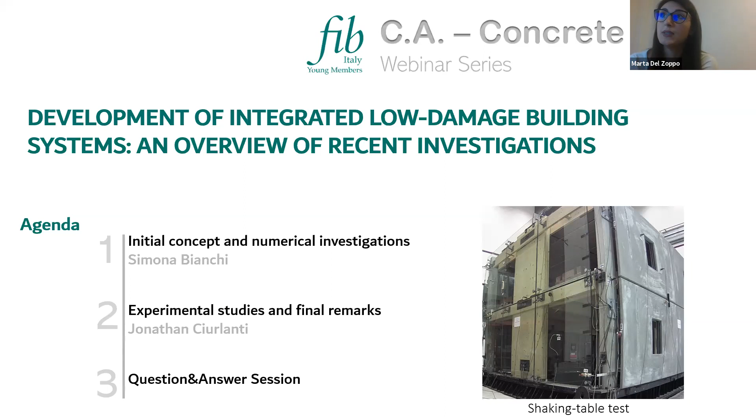Today we are talking about the development of integrated low damage building systems, an overview of recent investigations. We have two speakers today. We will start with a brief introduction about low damage techniques and some numerical investigation, then we will see some experimental results, and then we will have a question and answer session. Please write all your questions in the chat, and we will answer them at the end of the presentations.

The speakers for today are two brilliant young researchers. The first is Simona Bianchi, a postdoctoral research fellow at University La Sapienza of Rome. She works on multi-criteria fragility-based design and assessment with a focus on non-structural components, and has wide knowledge about seismic assessment, retrofit, and loss assessment, especially as an expert on low damage technologies.

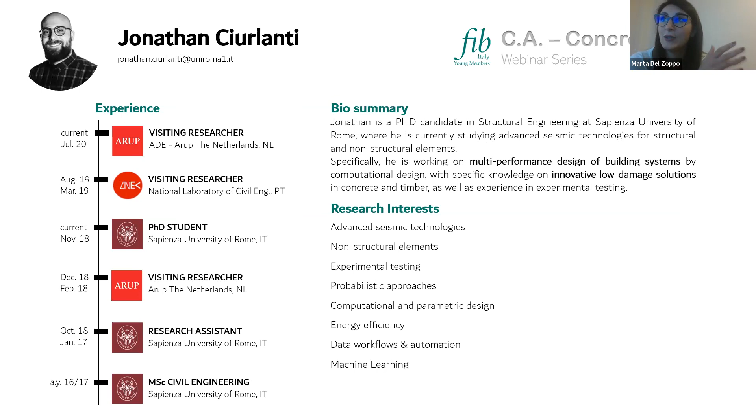The second speaker is Jonathan Ciurlanti, currently a postdoc and PhD student at University La Sapienza of Rome, working on multi-performance design of building systems with a special focus on innovative low damage solutions for concrete and timber structures. Both of them have large experience in experimental testing, as you will see during the webinar. Thank you to both our speakers for being here today, and please, the floor is yours.

Thanks, Marta, for the presentation. So let me share the screen. Here it is, okay.

Good afternoon, everyone. As Marta said, I'm a postdoctoral researcher at Sapienza University at the Department of Structural and Geotechnical Engineering, where I'm working with Professor Pampanin, so maybe most of you already know him. Today, with Jonathan, I will present part of our research work.

I will start by giving you an idea of what we mean by integrated low damage building systems, and then I will go to some numerical investigations we developed. This will be the boring part of today's presentation, while Jonathan will grab your attention with the most exciting part, the experimental testing.

Now let's start. Think about a new building or a recently built structure. What do we expect after an earthquake or a major seismic event? If we were good designers, at the end we are expecting the formation of beautiful plastic hinges at the end sections of our structural members, and a beam sideway mechanism of collapse. So at the end, our buildings are not expected to collapse, but they can stand, allowing people to evacuate.

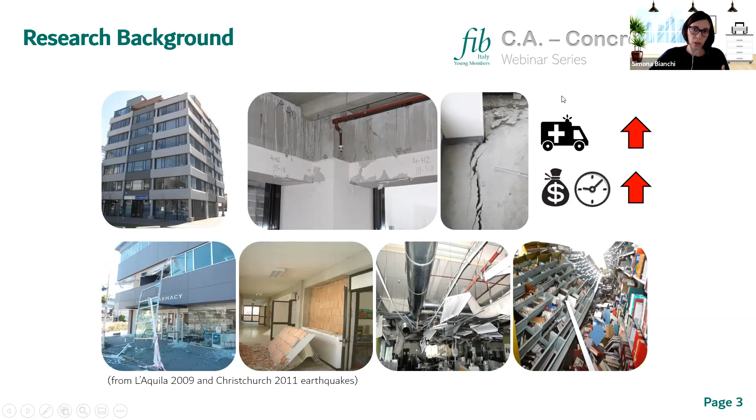If we look at the non-structural components, unfortunately the situation is very different, because they are typically not designed for seismic loads. So at the end, we can have high damage even in case of low seismicity events. If we follow our traditional approach, at least for the structural part as per capacity design principles, this design methodology will lead to huge, substantial economic losses in terms of both repair costs and downtime.

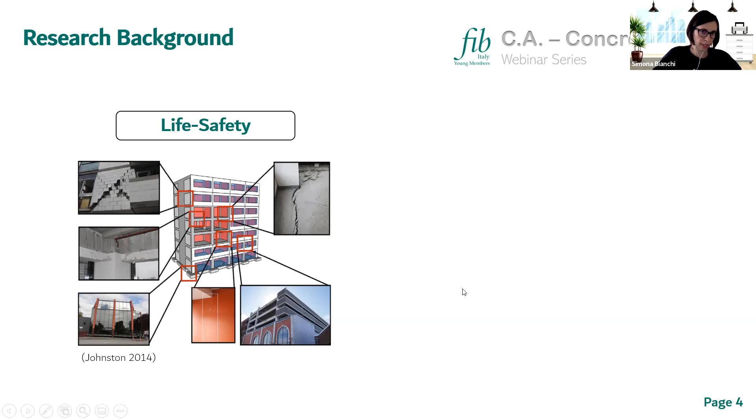But today, in 2021, is this traditional approach based on life safety criteria still acceptable? This is not enough, because we need to raise the bar in earthquake engineering to satisfy the increasingly seismic demand from our society to create more resilient and stronger communities. To do this, we need to shift from this life safety approach towards a damage control design approach, by simply shifting our design objective towards a higher safety level for our structures. By adopting this design philosophy, we can create buildings with controllable damage, and reduced losses in terms of both repair costs and business interruption.

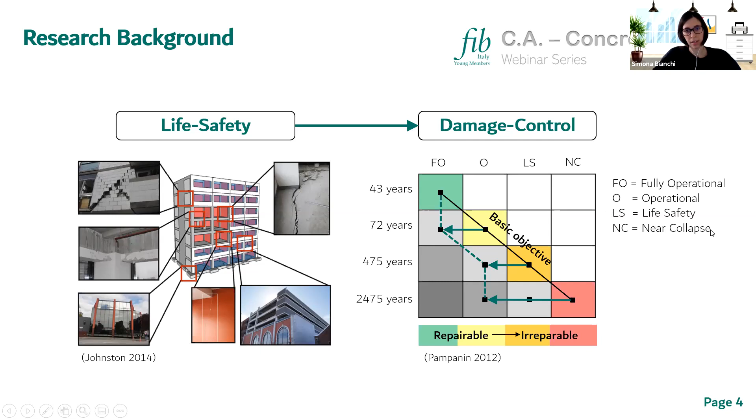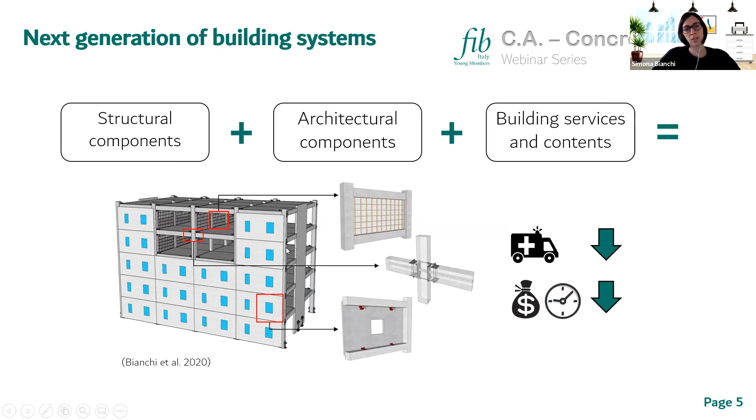Following this goal, our idea is to create an integrated low damage building system comprising innovative low damage detailing for both the structural and non-structural components. These should represent the next generation of our building systems. Now let's see a bit more about these low damage technologies.

About structural components, we are focusing on the so-called PRESSS technology, precast seismic structural system. This system consists of unbonded post-tensioned pretensioned cables within the structural members and external mild steel, so-called plug-and-play dissipators.

So at the end, we have our hybrid connections with a ductile behavior, and this connection behaves following this so-called flag-shaped hysteresis loop, which also allows us to have almost zero residual displacement after earthquakes. So this is a great advantage.

Imagine we substitute the previous plastic hinges with these sacrificial fuses. These are the weakest element of this chain in this case. After the earthquake, I simply go there and substitute my damaged dissipators for a cost of 30, 40 euros per each, and that's it. So we have a lot of savings.

So as Pampanin would say, we go to our seismic shop or seismic market to buy new dissipators for our houses.

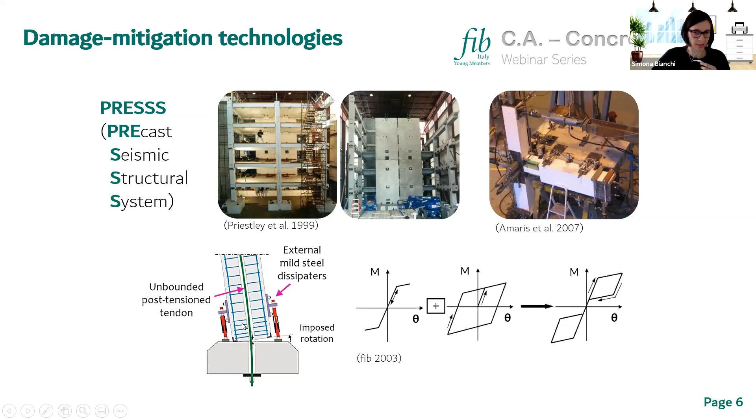Now, let's see what happens about non-structural components. In this case, we mean the introduction of low damage detailing, so we need to modify the connection system or the panel modularity of our non-structural components.

Look at this masonry wall. In this case, we can divide our monolithic panel into vertical panels with internal and lateral gaps, and these can allow the formation of a rocking mechanism, so we can achieve a specific damage state with higher seismic demand, in this case in terms of drift, of course.

If we use the same approach for drywall gypsum partitions, well in this case we do not add material or labor. We have the same traditional partition. We just need to modify the connection details, and that's it.

Or another solution, we can add these dissipative connections, but we are looking later a bit more about these ones, so I'm not focusing on them now.

Or think about a suspended fully floating ceiling. In this case, the simple introduction of this elastic insulation foam into the lateral gap can allow us to achieve higher acceleration demands before these ceiling tiles can fall.

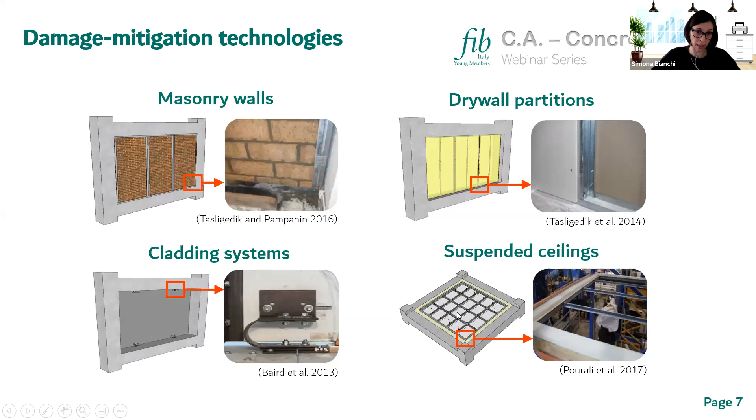Now, what about contents, which are very important to be safeguarded, as you know, in case of a strategic structure such as a hospital, for example? Well, in this case, we had the opportunity to test an innovative solution, a low damage solution, comprising supplemental damping within the system. So imagine we have our non-structural component, our content.

We are going to attach it, connect it into our concrete floor slab by these anchors, these post-installed fasteners. Instead of the traditional one, we simply add a ring around the threaded part of our rod. By doing this, we can find high reductions in terms of forces and accelerations on these non-structural components. We found these in the range of 20 to 40%.

This was a research we developed in 2017, but it was based on a previous one that was developed in New Zealand, at Canterbury University, 10 years before, let's say, because the first prototype of this solution was already created.

Well, this was also our first experimental test. This allowed us to gain experience, let's say, in shake table tests at least, and instrumentation, tested up everything.

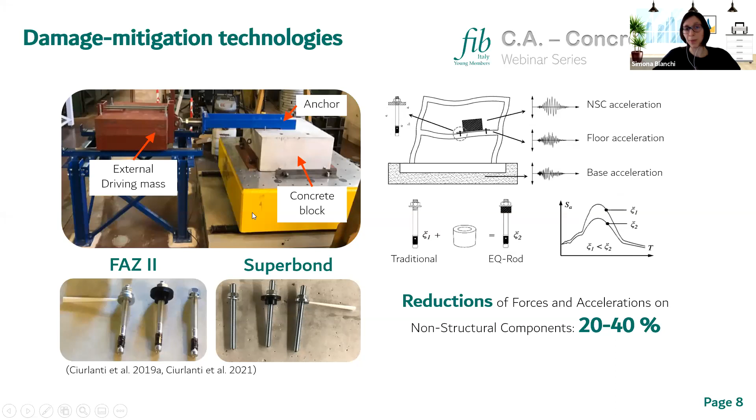And this was very good for us to be prepared for the big experimental testing that will follow, which is this one. So by combining all the previous solutions, low damage detailing, we can create this integrated system with very high performance, and at the end we can have cost affordable technologies.

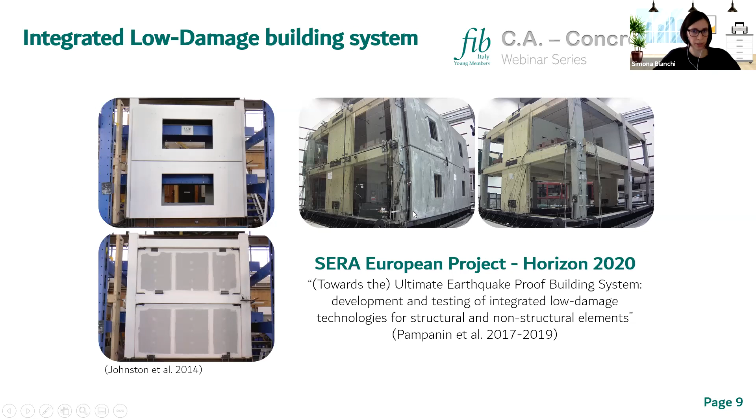And we had the opportunity to design and test such solution, thanks to this European Horizon 2020 project. Jonathan will explain better in detail everything, I'm not doing this now.

Now, let's hear a bit more about the numerical investigations. We implemented these studies in order to prove, let's say, the convenience of implementing such solutions.

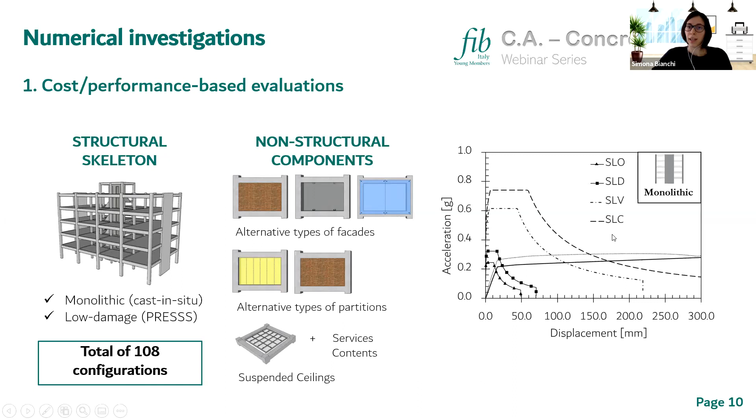First of all, we developed cost-performance-based evaluations: a parametric analysis on reinforced concrete case study buildings comprising alternative structural skeletons, so monolithic, low damage, frame, wall systems, and non-structural components. At the beginning, we studied the seismic behavior of this building configuration through a practical-based capacity spectrum method by using lumped plasticity models.

And we could develop this model because one of the advantages of applying low damage connection is that the behavior of these solutions can be easily represented by macro modeling.

For example, think about this structural connection. In this case, in addition to more refined finite element modeling, or for example, the adoption of a contact element simulating the gap opening, the so-called multi-spring element.

In this case, we adopted, we can also simulate the behavior of this connection through these rotational springs working in parallel at the end section of our structural member, so beam, but also at the base of our columns and walls.

As I said, this allows us to control the connection behavior as well as the achievement of specific damage states, which in this case are the collapse of our external dissipators and the yielding of the internal post-tension bar.

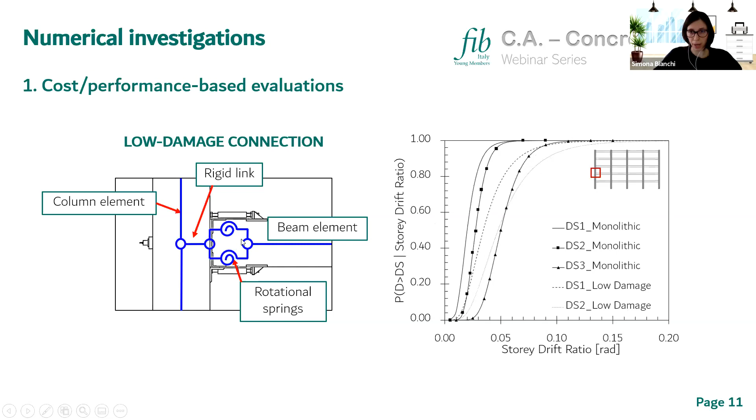Now, what did we find at the end of this parametric analysis? We found that we can have great benefits in applying these technologies, which was expected, of course, but not quantified yet. In this case, we found a reduction in terms of expected annual losses in the range of 50–70%, while looking at the downtime in the range of 3 to 7 months.

So think about the downtime. If we consider that we are working with modular, flexible, articulated precast components, at the end we have a sort of Lego system, let's say. So we have a very fast time to build this typology of systems.

Looking at the savings in the building life, we found these around 200 euros per square meter. So our building, which has a floor area of 500 square meters and has 5 levels, at the end we can have 500,000 euros of savings in the building life. So let's say a large amount of money to be saved.

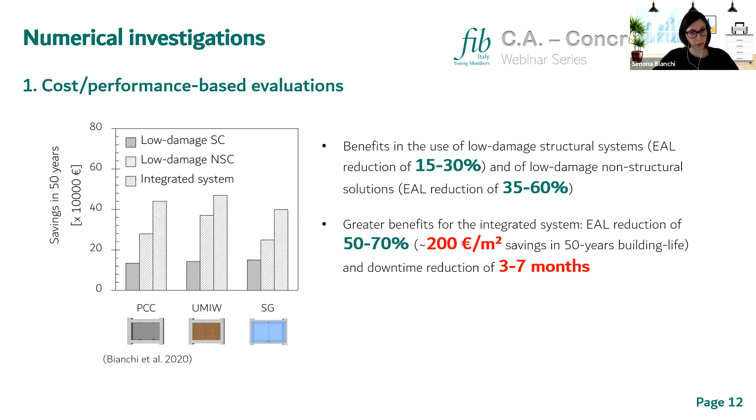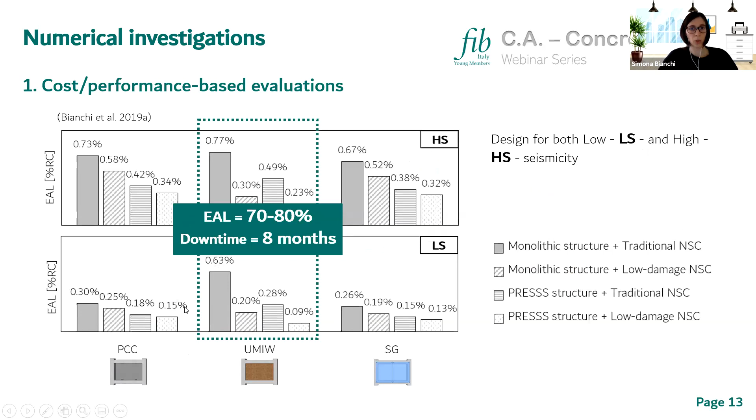Then we implemented the same approach, parametric analysis, considering low seismicity zones. And even in this case, we found great reductions in terms of losses by at least 50% when compared to the traditional monolithic structures. But the question is, why are these advanced technologies not so widespread yet?

Well, this is due to the fact that these long-term economic analyses are not always implemented, unfortunately, in practice at least. And because there is almost always the perception that this technology would lead to higher costs.

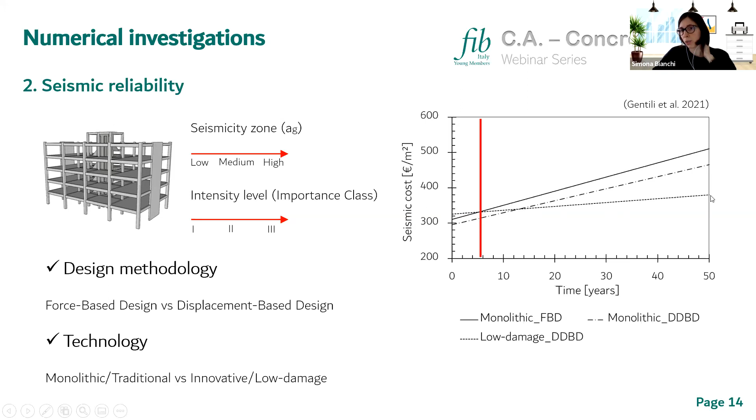Well, this is true because if we consider the initial costs when compared to a monolithic structure, this cost is higher in a range of 15–20%. But if we look at the seismic costs over a long time, we can see that after 5 to 10 years from the construction of our building, this initial difference can be cancelled. And after this point, we can have savings only, so a great advantage.

Now, following the same research line, we developed feasibility studies for high-rise buildings, to prove the applicability of these solutions even in this case.

And in this case, we also considered low damage dual systems. So look at how much we can decrease our residual displacements when compared to the monolithic structure. The residual displacement is a damage indicator of the loss of structural safety and can contribute a lot to increasing our losses. So at the end, looking at the losses, expressed in terms of probable maximum loss...

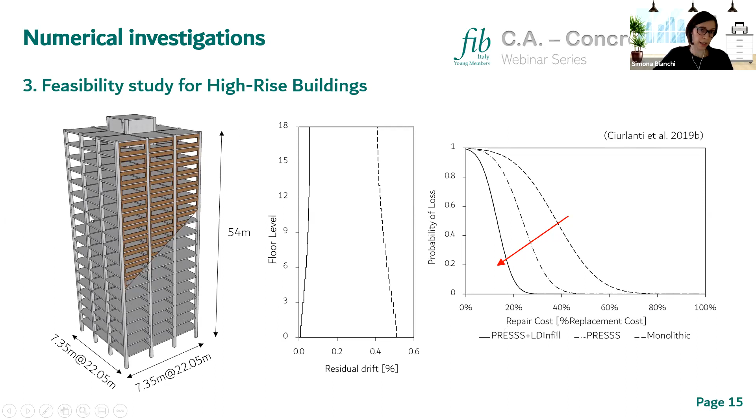We see that the maximum repair costs go from 80% as a percentage of the replacement cost of the structure for the monolithic building, to 30% for the integrated structure with the precast technology plus external, let's say, low damage facade.

Well, last but not least, we started to develop fragility and risk assessment analysis, and we are still working on this topic. We developed these studies to finalize our comparison, because by adopting this low damage detailing, we can achieve a better seismic performance. So we can move our fragility curves towards higher demand levels. Moreover, another advantage is that imagine we have this fragility curve, and this is our tailored, ideal response. Well, in this case, by adopting this low damage detailing, I can easily design my system to satisfy this behavior.

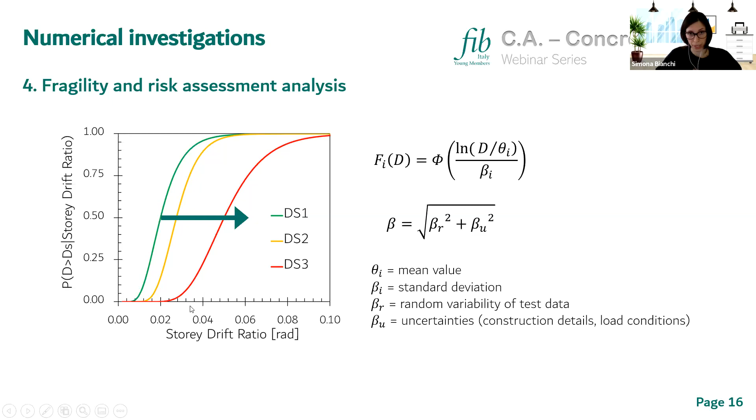Now, this is just, let's say, work we developed on non-structural components, in particular to study the global behavior of our system comprising precast concrete claddings with alternative connection systems, traditional ones and dissipative ones. The dissipative is a U-shaped flexural plate, so these flexural dissipators, during earthquakes, have inelastic deformation moving back and forth along this plate.

So at the end, with this solution, we can even dissipate the seismic energy, and we can reduce our demand on the attached heavy precast panel. While if we consider traditional solutions, this type of connection is designed to limit this interaction. These can be even less than 5%, especially at the beginning of our capacity curve, let's say. But these connections are expected to fail at a drift level of 1.5%.

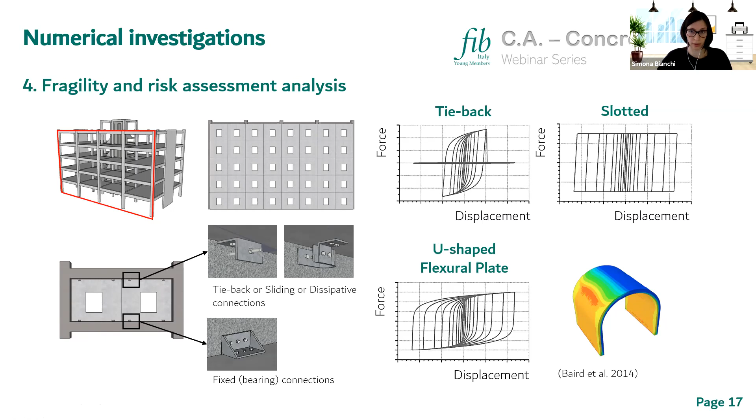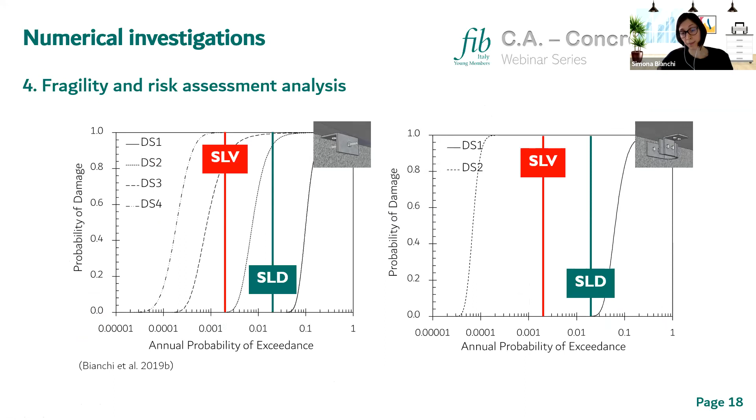While this innovative solution is not expected to fail upon reaching a specific drift level, it instead fails for fatigue criteria, that is, in this case, more than 150 cycles at the maximum stroke. So another great advantage. Then we implemented this fragility risk assessment analysis to highlight the seismic potential of such solutions, even in terms of probability of damage not being exceeded at higher intensity levels.

With my presentation, I want you to leave with two main messages. The first one is that there is in seismic engineering this need for enhanced structural seismic safety for our modern buildings. This can be achieved by the application of advanced technologies, but even by the application of more appropriate design methodologies, for example. These could create literally this earthquake-proof building that society is expecting.

Another aspect is that we need to focus not only on structural components, but also on non-structural components and contents, to create these integrated high-performance buildings. And the other aspect is that we need to implement long-term economic evaluations to really understand the benefits of implementing a specific solution.

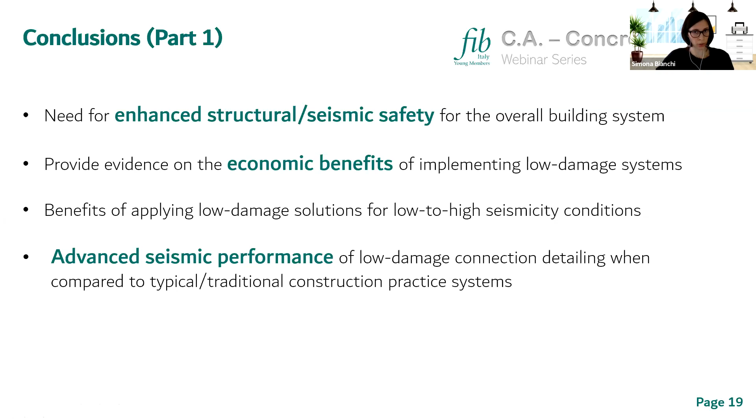I want to finish saying that we are still working a lot on these topics, especially on the last part, in order to study the seismic reliability and the resilience implications of such solutions. So a lot of work is still ongoing.

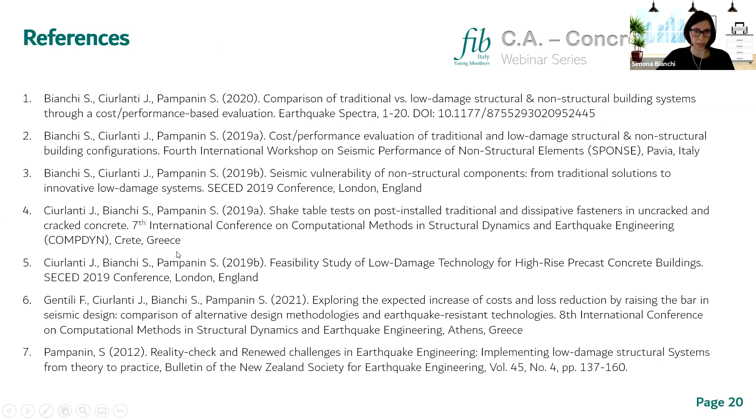Okay, now it's my turn. So cool. You did so well that now it's hard to replicate, I guess.

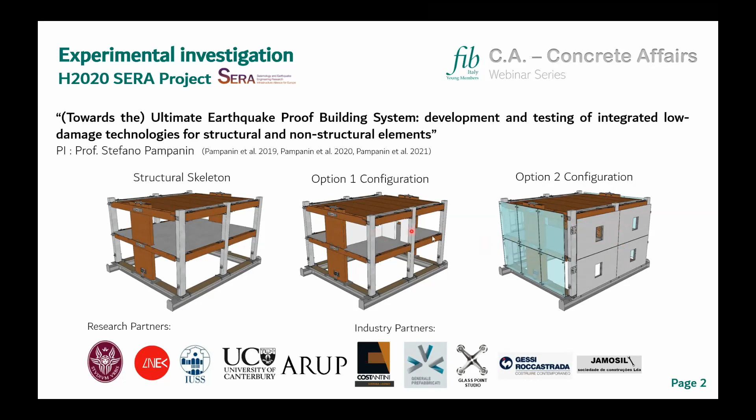Honestly, this research project has been a milestone in our research career, because we had the possibility to collaborate with different partners, either academic or industry, and we actively participated in each project phase, from the early stage design to the post-processing, which, despite us drafting 6 articles, is still ongoing, because we are deeply studying the dynamic behavior of the specimen yet.

We started with the design of the structural skeleton, and subsequently the connections and structural details. Then we saw the components born in the supplier's factory, which we also followed with the pre-assembly of the components. Then they were shipped to Lisbon, fortunately not by truck as the specimen did, but by airplane.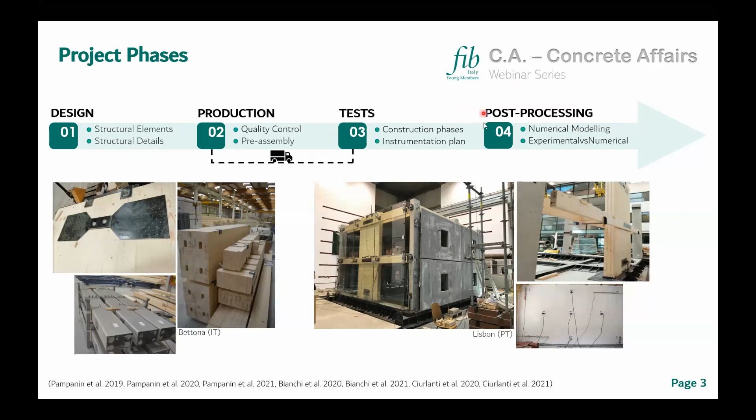There, we were involved in different tasks such as the instrumentation plan and construction phases, and of course the setup, and last but not least, the experimental test. And then, as already said, the post-processing is still ongoing.

The starting point of our design is this modular large-scale benchmark building, from which we extrapolate a submodule, and using the Cauchy-Froude similitude, we scale it with a scaling factor of 0.5. We get the main characteristic of our specimen, which is split into main directions: the frame direction in the longitudinal wall, and the wall direction in the opposite direction.

For the frame direction, it's easy to understand it's a moment resisting frame, a low damage moment resisting frame made by timber beams connected to reinforced concrete columns with a post-tensioned cable at the center of the section, as Simona showed, and also plug and play dissipators at the edges of the beams.

For the wall direction, the seismic resistance system is these two rocking CLT walls that were vertically post-tensioned, with dissipators at the base connecting the wall with the steel base plate.

For the slab, we adopted two different flooring systems. For the first floor, we adopted a TCC flooring system, timber concrete composite, which is made of parallel timber joists with a concrete topping.

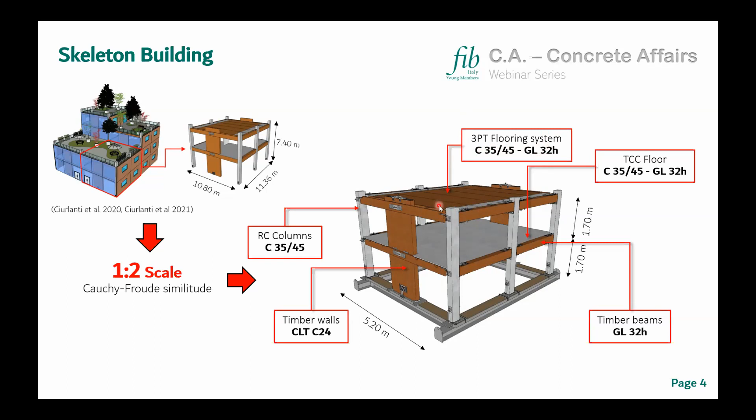While the top floor slab was a 3PT flooring system that we designed in collaboration with the University of Canterbury, which is practically a timber concrete post-tensioned beam screwed all together. And then this is the seismicity we used to design the building.

We picked 5 locations, 5 high seismicity locations along Italy, and from the output, from the mean spectra, we used an advanced design methodology called direct displacement-based design.

So we used a target drift in the frame direction of 1.2, while in the wall direction 1.15. That's to be compliant with the shake table characteristics, maximum payload as well as dimensions, but frankly also to have enough seismic demand on the connections.

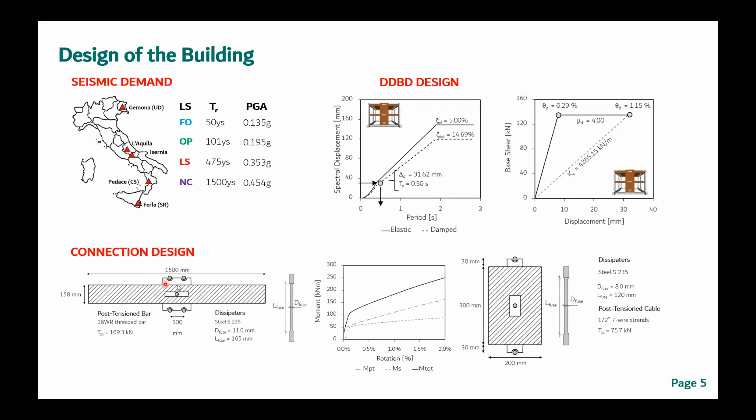And so, of course, we arrived to the internal actions, and we designed the connections, drafted into sketches about the wall-base connection and the column-beam interface connection. You can see here better that they present both a post-tensioned element in the center of the section, and then the plug and play acting at the edges, dissipating energy.

For option one, after many tests on the bare frame, when we caught the behavior, we started building the partition of option one: bare frame plus this T-shape internal low damage fiber reinforced gypsum partition, made of two main components: a sub-steel frame inside, and gypsum board attached at the edges. As you can see, the damage-adaptive details included internal designed gaps, and disconnecting the steel frame and gypsum board as much as possible from the main structure, to have less interaction.

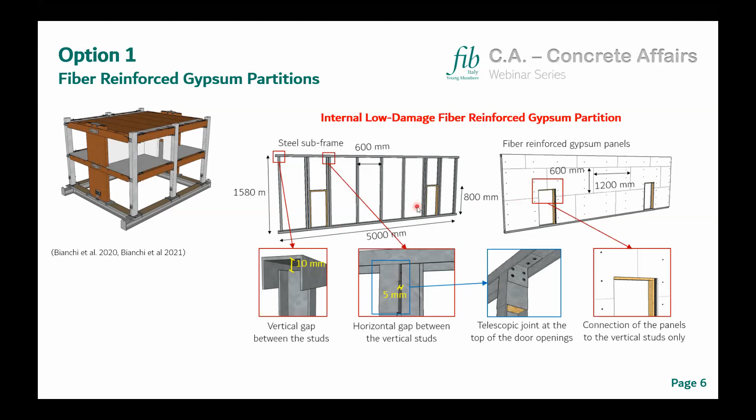Here the integrated low damage building system for the cladding system, GFRC glass fiber reinforced concrete precast cladding, uses two different topologies of connection. One was a sliding connection that allowed movement of the panel in the in-plane direction while avoiding the out-of-plane mechanism, while for the restrained anchorage, we used this connection: a steel plate nailed to the timber beam with a bucket filled by grout.

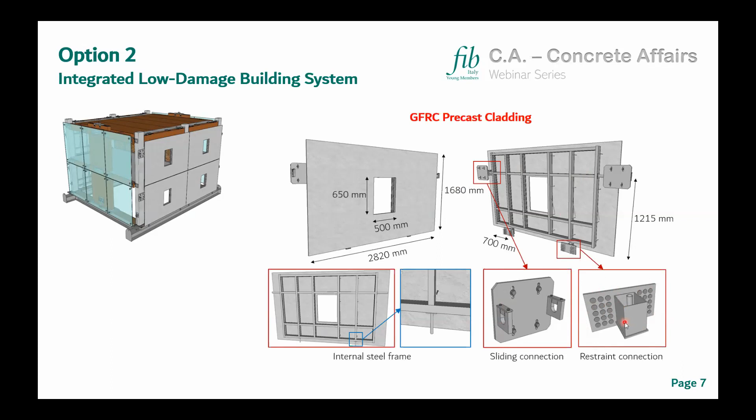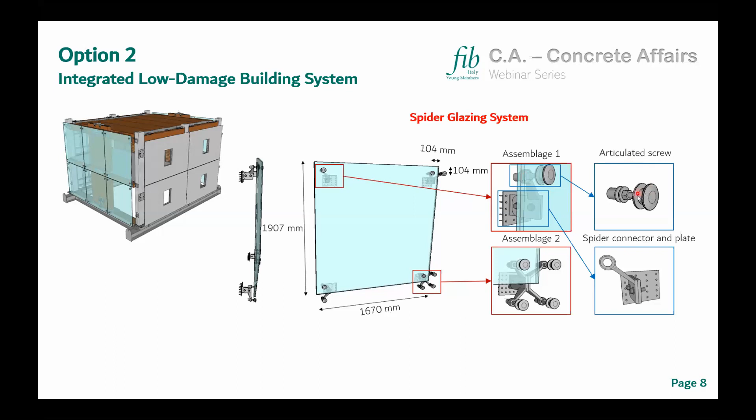For the spider glazing, it's worth mentioning that it was the first time this system has been tested dynamically, which is also why we chose it. The expected behavior was this individual rotation of the glass panel, due to a spherical joint in the rotule screwed into the spider connector.

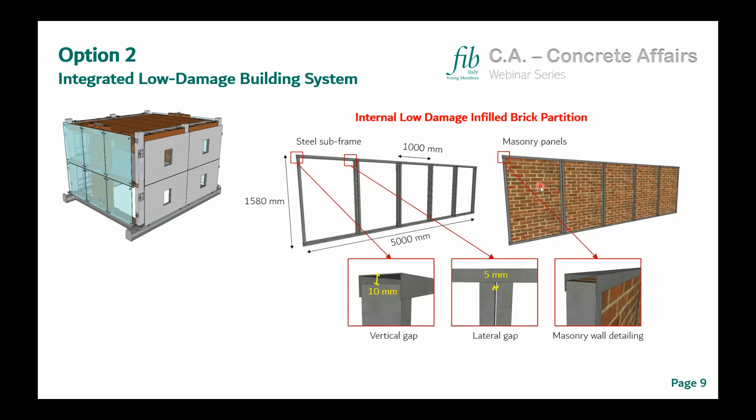And here the last component, this rocking internal low damage infill brick partition. As you can see, the principles are the same as we adopted for the gypsum partition: we left internal gaps at the edges, from the vertical stud to the column, and also left some space from the top brick line of the masonry panel to the horizontal channel. Of course, we built the masonry panel inside the horizontal channel on top of the first floor.

So after this amazing design process, with all these renders, on the 1st of April 2019 at 8:00 a.m., this huge truck arrived in Lisbon with all the components. We understood that the construction of the test building would start soon.

As usual we started from the bottom, placing these foundation steel plates on an existing foundation plate already available in the lab. This existing steel foundation weighed 9 tons, and the maximum capacity of the shaking table was 40 tons, so barely 25% of the maximum payload was already taken up by the foundation. That was another challenge we faced.

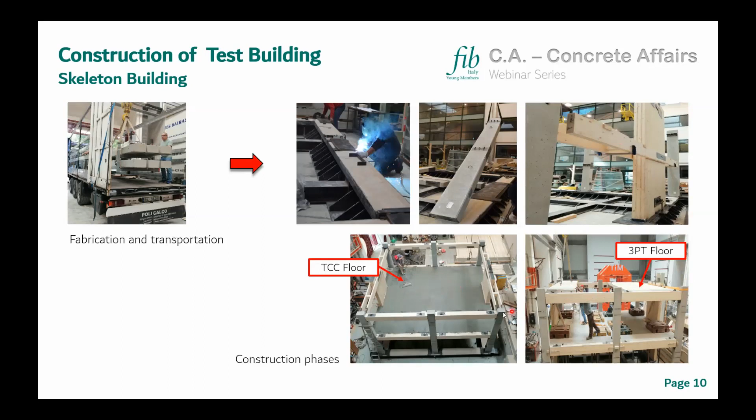In the construction phase, for the structural elements, we started by uplifting the vertical elements and kept them standing using temporary supports, then proceeded floor by floor. We built the first floor, then put in place the beams of the top floor slab. Here are a bunch of structural details.

I want to focus your attention on the top left, where you can see how many instruments we used to fully monitor one beam-column joint. Another thing I want to point out is this connection called the bow tie, which I'm really fond of - named for the shape of the steel plate - but it's part of a bigger connection wrapping the slab and the wall at the external beam edges, as you can see here.

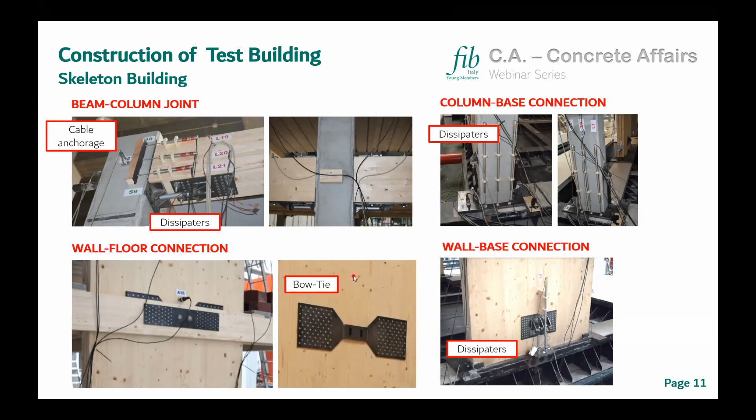Imagine this buttonhole, with a pin inserted in it. During the rocking motion, the wall was free to move, and this button would maintain displacement compatibility from the slab to the wall and allow transmission of the shear forces on the stories. So, a bit more about the details we adopted for the non-structural components.

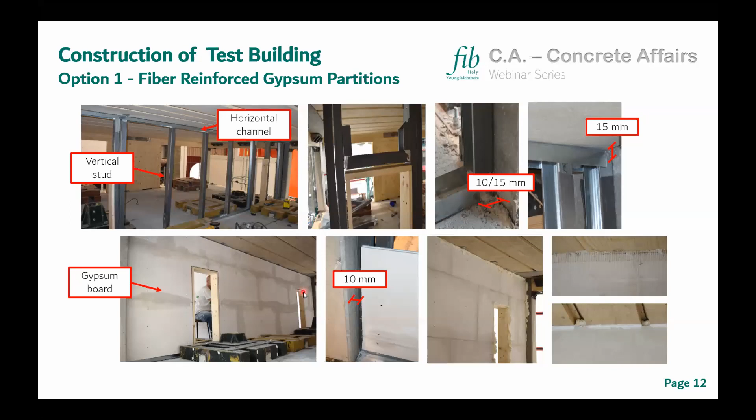As you can see here, this connection on the corner is just to avoid diagonal cracking, and also this connection from the gypsum board to the main structure, as already said. Then here we did the finishing with foam and so on. After the test, we demolished the previous partition and started building the new one.

So the masonry partition with the same details that we used for the previous one. But you can see here we left some space from the brick to the horizontal channel, and that's how it looked like in the end.

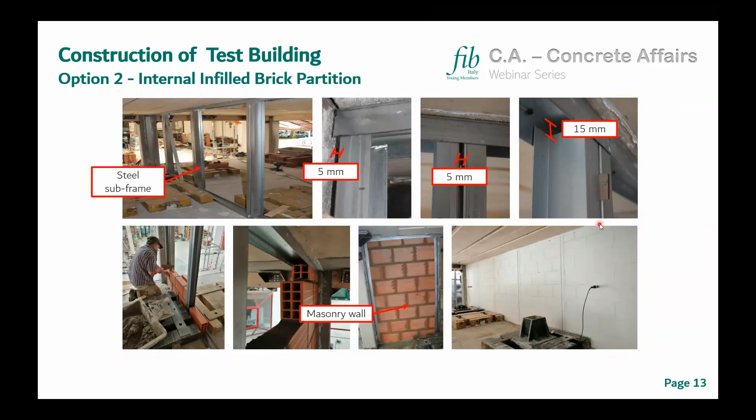I want to say something about this detail for the facade, and also a funny story at the end. Here is the sliding connection we adopted for the cladding system, and this is the restraint anchorage we adopted. This vertical joint is inside this rotule, and then this device is screwed into this buttonhole on the spider glazing, creating a system that is really beautiful to see in the lab, but even in real buildings.

The funny story is that it's normal to think we build first the internal partition and then the external facade, but once we did it, we realized that to check the status of the internal partition, we needed to get in. The only way was the scaled door on the precast cladding, and honestly it was narrow enough that it was hard to get in. So Simona was in charge every run to put the stairs, get in with a light, check the status, mark the new cracks, and get out. I was just in charge of holding the stairs in place. So that's woman power, let's say.

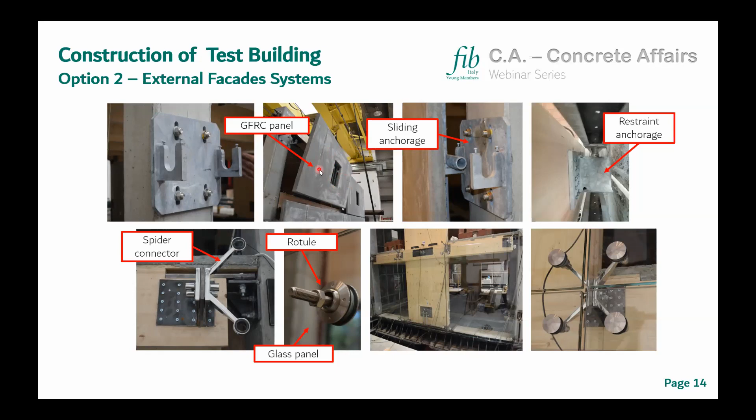Just a bit more about instrumentation. As already said, we used up to 78 instrumentation channels to fully monitor the behavior of the building.

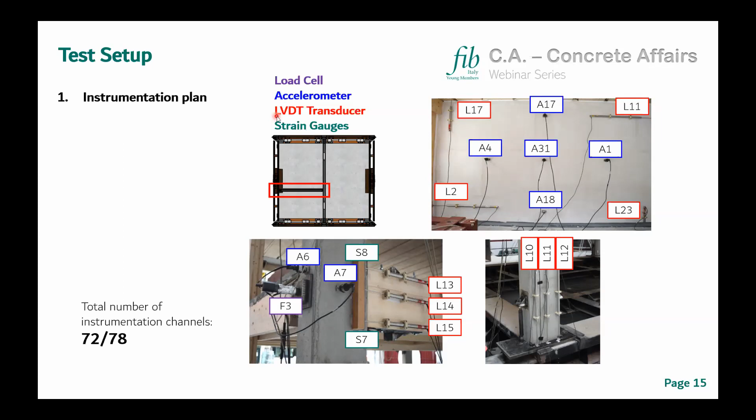We considered load cells to monitor the post-tensioned force in the cables as well as the bars, then strain gauges to live monitor the stress-strain of the dissipators, as well as accelerometers and LVDTs to measure relative displacement, for example the gap opening between the timber beams and the columns, and then accelerometers and optical devices to capture the global behavior of the building.

Here a bit more on the selection of the accelerograms. We selected 5 accelerograms just for the horizontal direction: the first 5 were 2 near-fault and 3 far-field, while the 6th one was used for the vertical excitation. We scaled them to be spectra-compatible with the 4 limit states we had already chosen.

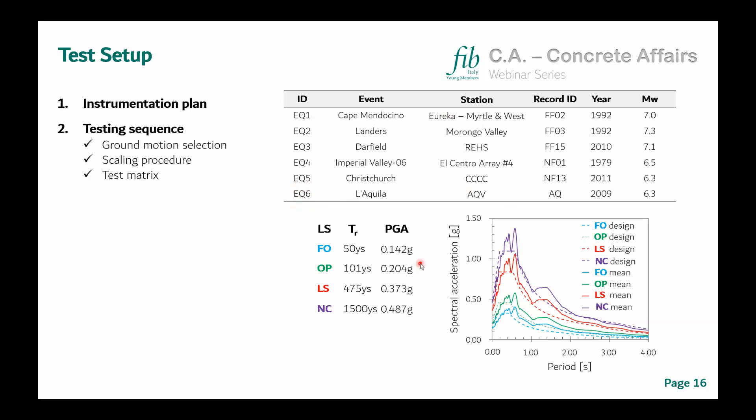For 3 test phases, 4 limit states, and multiple accelerograms, we ran this test protocol: 3 unidirectional tests first, X, Y, Z, then the bidirectional with ground motion at 45 degrees, and then the tri-directional one. In the end, the total amount of ground motions we ran was around 250, because we reduced the number of ground motions for option 2, and for the higher levels we decreased the number of tests, running only the bidirectional and tri-directional ones.

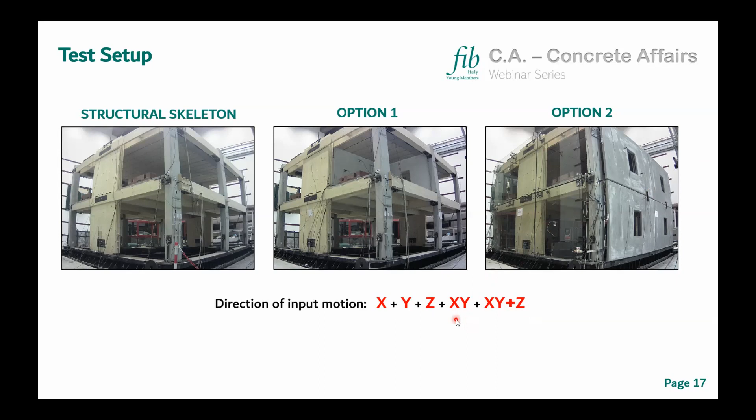Here's the best part, the video showing the behavior of the option one building system, and here with an action cam we captured the internal behavior of the internal partition. This partition usually collapses around 1% of drift, meaning the loss of the gypsum board and even buckling of the vertical studs in the steel frame. Here we reached 1.32%, and the only damage we got was this diagonal cracking due to the timber frame of the doors, while the perpendicular partition, hidden here, had no damage.

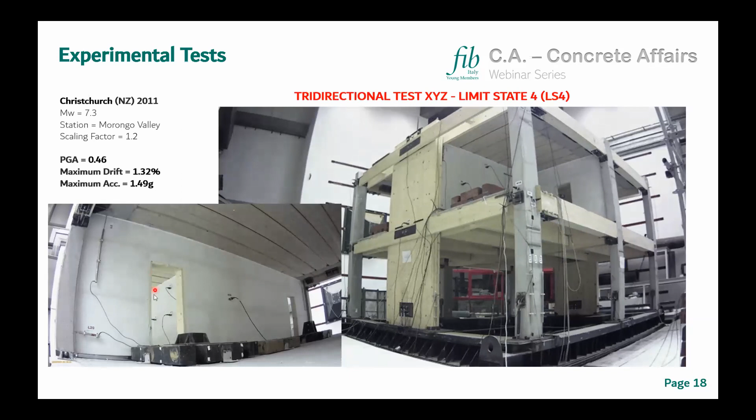So I'm a bit lying because we observed some damages. The dissipators, as Simona already mentioned, are designed to be stressed and replaced. We also got this double-shape deformation of the steel plate at the end of the gravity beam that was spanning from one frame to the other, just from the vertical excitation. We also observed some disconnection from the slab to the top floor.

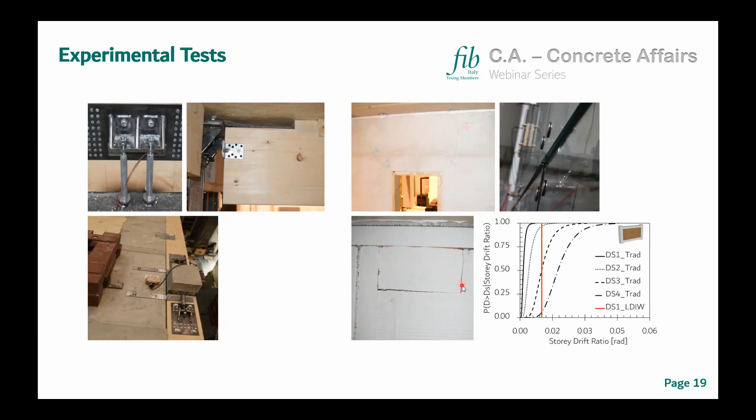For the non-structural components as well, I already spoke about the gypsum partition. We have a loss of planarity, basically the onset of an out-of-plane mechanism in the glass facade, while funnily we had just one loss of mortar in one brick in the masonry partition.

Here are a few experimental results. On the left, you can see the global behavior of the building in terms of acceleration and interstory drift. If you remember, I said we designed the building for a target drift around 1.2, 1.15%, while the behavior we reached was twice the expected interstory drift for the skeleton building.

That means that, of course, for the cumulative deformation on the dissipator, the system was highly reliable. And here are some secondary spectra about the top floor in the frame direction that we used as input demand for the non-structural components.

And here's the proof that we haven't got any damage on the non-structural components. In particular these two dotted and dashed lines are about the glass facade and the cladding, while what you can see, this decay, is due to the settlement of the bricks in the channel that was on the first floor.

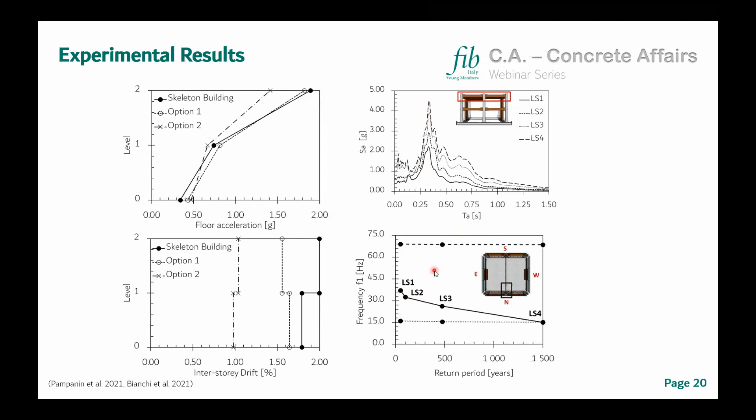And so we are at the last slide, because we managed to build up a numerical model, a lumped plasticity numerical model, as already mentioned by Simona. You can see that it catches very well the behavior of the building, also from the global response here in terms of interstory drift at the second floor.

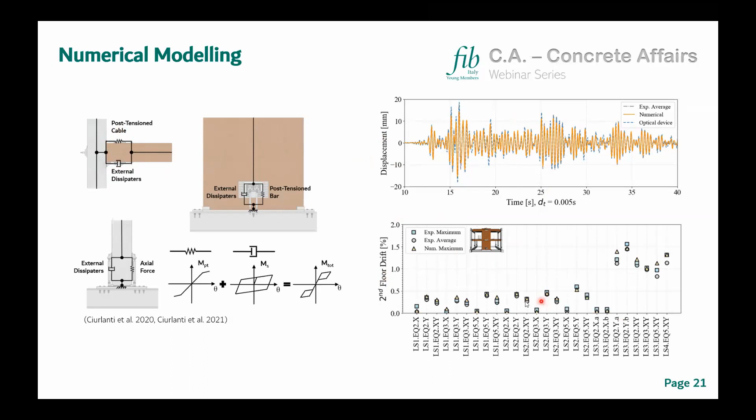This is really important, because as a conclusion, I want to say that this advanced seismic performance of the test specimen that I've shown you in the previous slide proves the efficiency of this integrated solution.

But I want to also highlight the advantages we had in terms of time of construction, because of the modularity of the system. It's like a Lego system that is very simple to build.

And it's really important that we can accurately predict the seismic behavior of such buildings, just because if you want to spread this technology, professional engineers have to be capable of designing and predicting the building behavior, of course.

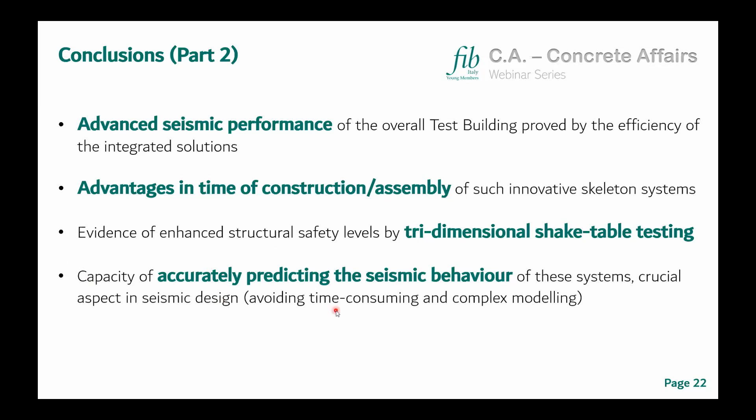And here we are, so the final remarks. I want to point out this sentence, because for me it's really important: think about the modularity of this system. We can easily, for example, rearrange the internal spaces due to the modularity of the system as well, so we can achieve a sustainable approach from the design.

Another thing is that I spoke about a low damage integrated system, which is really important in 2021, but looking at the future, we need to include the seismic performance within a more general high performance approach that comprises the energy efficiency of the building, and other performance aspects like acoustics and air ventilation and so on. That's really important, the goal we want to achieve in the coming future, let's say.

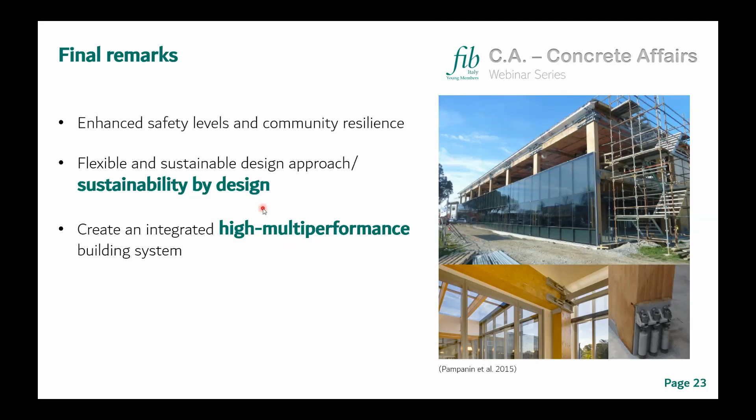So that's all for me. Just a bit of reference to the last work we submitted, and thank you for the attention and for the opportunity, of course.

Thank you very much, Jonathan, and thank you also Simona for these amazing presentations. Both of you were really clear and presented such interesting results from these amazing projects. This is a really great opportunity for PhD students to be involved in such huge projects, having the opportunity to manage such experimental testing, large scale shaking tables, and also super innovative work.